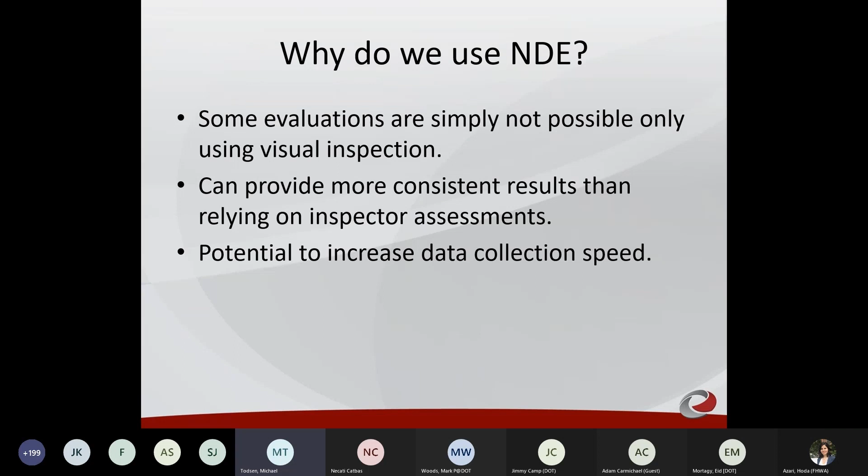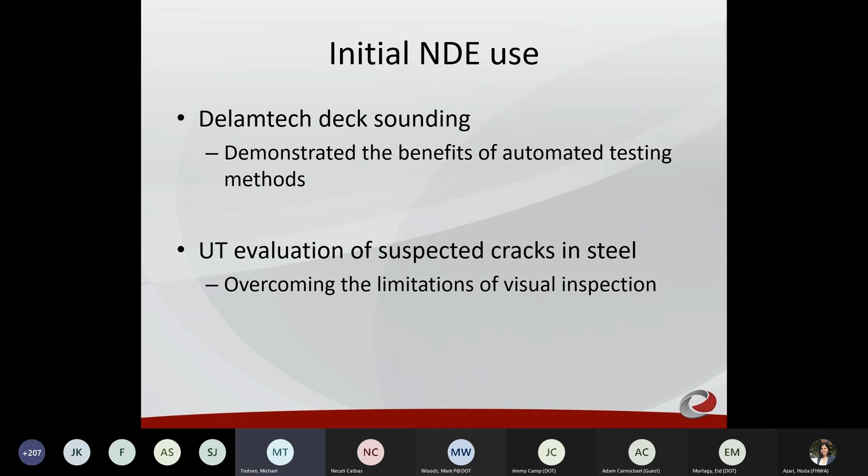When did we first get into using NDE in bridge inspection? There are kind of two initial cases - I'll get into both of these more later - but first was using equipment called Delamtech, which we used for deck soundings. Then using ultrasonic testing for evaluating potential cracks in steel structures.

Currently, we use it for deck inspection, which led into some use in substructure as well. Obviously, structural steel is very common, and we're getting more into the instrumentation and health monitoring side of things. We've done some work with underwater evaluations - I don't know if everyone considers this NDE, but it provides us with some valuable information. And we're starting to get into drone activity a little bit.

All right, let's start off with the deck evaluations. What we're looking for is really a project level assessment so we can use information in the development of plans for repair work. Looking at our typical multi-beam or girder bridges, steel girders or pre-stressed beams make up the majority of our inventory with a concrete deck.

We commonly use a concrete overlay using a low slump dense concrete that other people may have heard of as the Iowa mix. We've been using it for quite some time, and we now have a lot of bridges in our inventory that are ready for replacement of that overlay, and we'd like to place a second overlay instead of replacing the deck where possible to keep it more economical. But we need to understand the condition of the deck underneath that overlay to really understand what we have to work with.

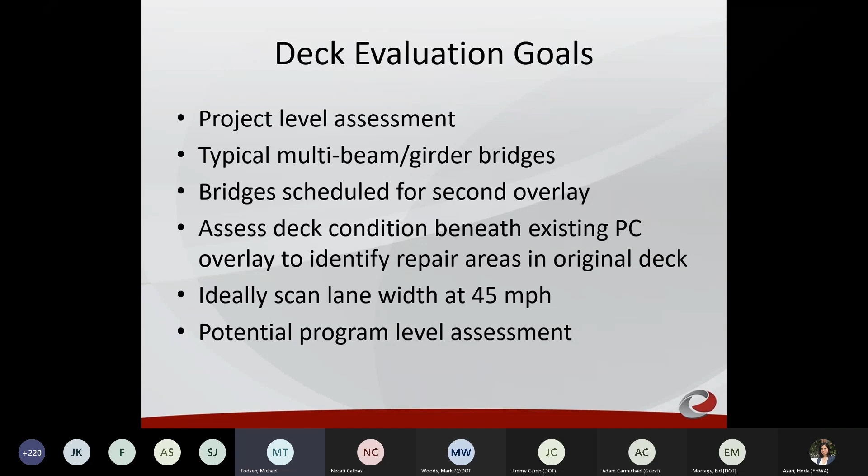Here's some detail on the types of overlays we use. We mill off a 1/4 inch of the original deck and put back 1 3/4 inches of our dense concrete. At the same time, we'll remove any deteriorated areas in the original deck as partial or full depth repairs.

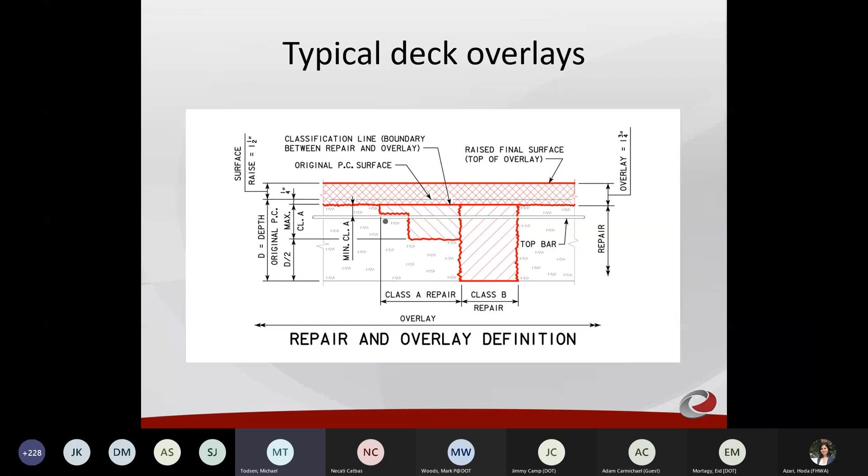Now, when we go to placing a second overlay, the determination of those deteriorated areas in the original deck gets to be the challenge. Just to give you an idea, a typical spot on the bridge deck that's been milled and the partial depth repair has been cleaned out, ready for placement of the overlay.

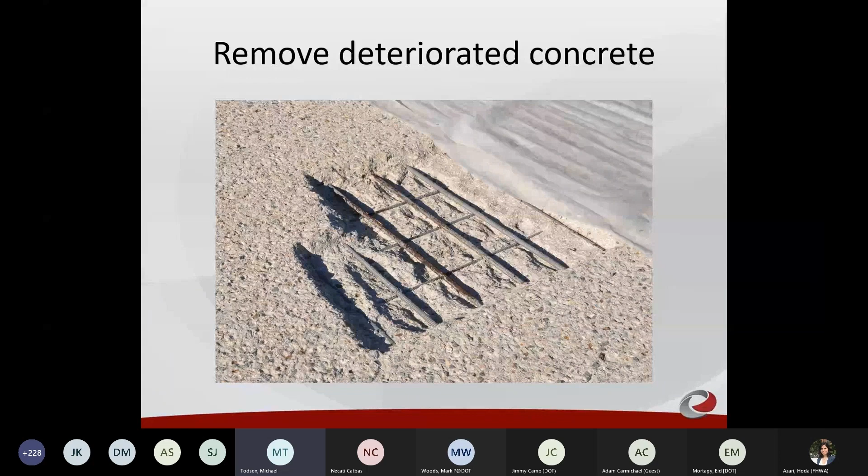We place the overlay, we put a slurry coat as a bonding agent, and then place the dense concrete mix on top of there.

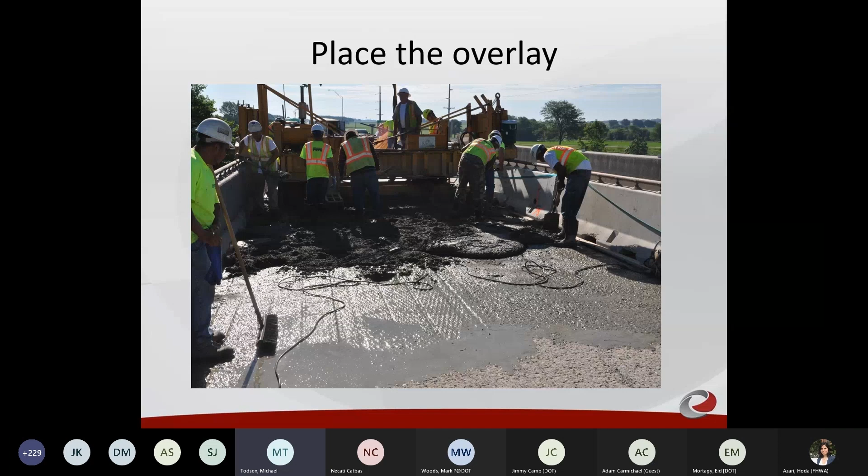One thing to provide some extra life in our overlays: after we start to get some debonding between the overlay and the original deck, or perhaps some deterioration at the reinforcing level and we get some hollow areas, we will inject epoxy to reestablish the bond and add additional life to the overlay. However, this can complicate our evaluation of the deck as it adds another layer of material that you have to take into consideration when performing evaluations.

I think we're all familiar with the traditional methods for hand sounding a deck. Obviously, the visual identification, and then by hammer sounding or chain drag. This is fairly time consuming and operator dependent, especially when relying on the hearing abilities of our inspectors, and when you get around heavy traffic, this gets considerably more complicated.

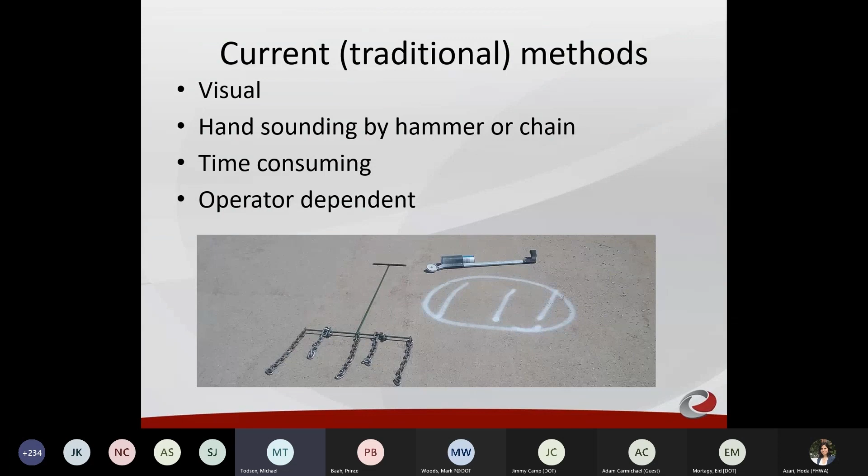Some of the limitations with the hand sounding or traditional methods: the delamination of the original overlay from the original deck cannot be differentiated from deterioration in the original deck. Hollow is hollow. It's hard to verify the depth by hand sounding. And really, we're looking to see what condition the deck is in.

As the deterioration is deeper into the concrete, it can become very difficult to identify it with hand sounding. And of course, the lane closures required not only interrupt traffic, but they also present more safety risks to the public, to traffic, and to our staff that are working in the traffic control or in the roadway.

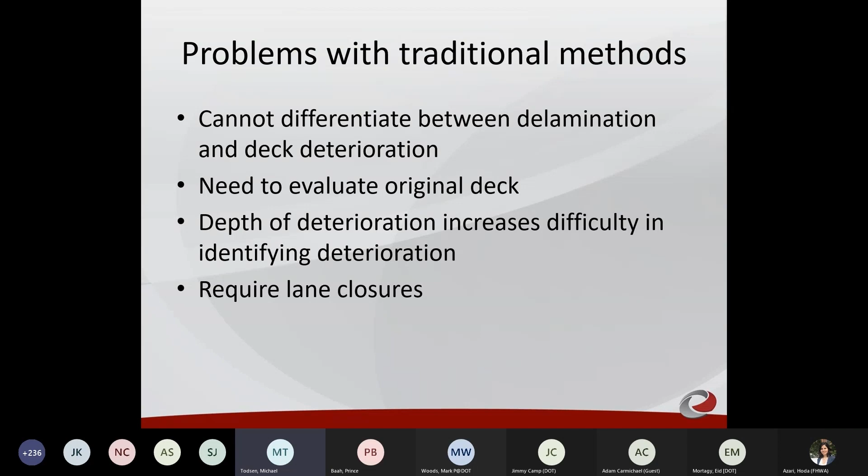This requires a lot of hand labor to clean up and prepare as a repair area, and that can affect the contractor by the requirements for allocating their resources to this project. The schedule is affected as there is a lot more time involved with all the hand labor, and there are budgetary effects to us as the contractor expense of doing this repair is on our burden.

If we had a method that we could better determine the condition of this deck in the development of this project, we probably would have considered other alternatives and may have looked more at a deck replacement than placing a second overlay. That may have been a more cost-effective solution in the end, had we known ahead of time.

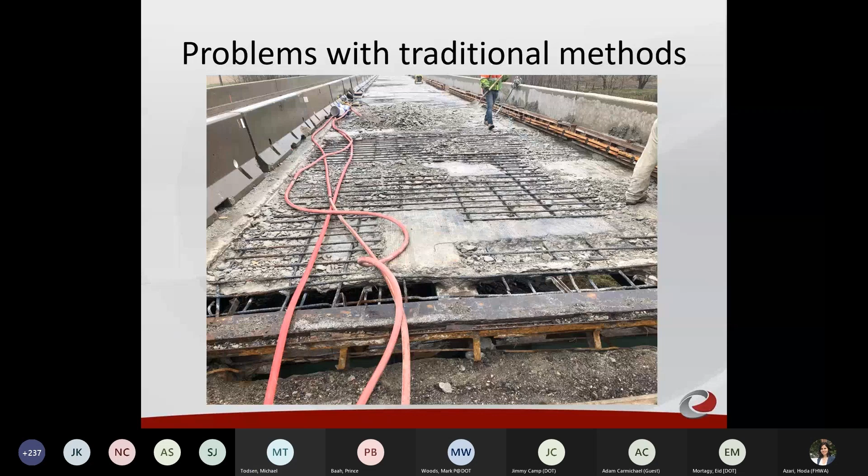The testing methods we've been using - earlier I mentioned the Delamtec. This was a system developed down in Texas in the 1970s. That's when we purchased our first machine. At one time we had 7 of them. It's an automated deck sounding machine.

It had a little hammer and a silicone-filled wheel with a microphone attached to it, and it could detect the hollow concrete similar to hand sounding. But it did remove the operator variability, and through several rounds of improvements to the equipment, we had an automated data collection system.

Unfortunately, the manufacturer of this equipment went out of business a number of years back. At the time, we purchased their entire inventory of spare parts. We have consumed that inventory and no longer have a functional piece of equipment.

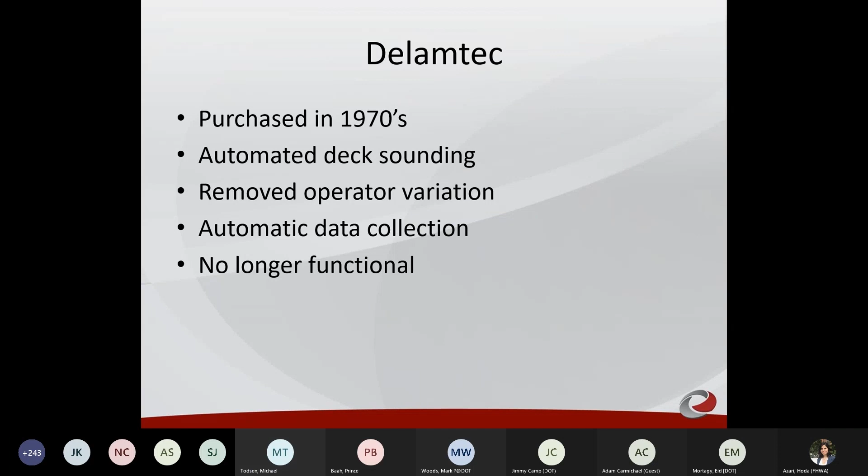So we've been trying to find another method to evaluate bridge decks and provide us the additional information we're looking for. We got some assistance with this. We started off with Rutgers University, followed up by some additional work with Jenny. We got involved in the pooled fund with University of Missouri, and then the SHRP2 program most recently.

We're looking for a practical solution, one that we can deploy readily, and that we can get good correlation with the field conditions. So looking at that project level assessment, we want to know where the areas of deteriorated concrete are on the deck, not just a general assessment that this deck may have some deterioration.

With Rutgers, we tried a number of different technologies. Starting off, we used acoustic or seismic systems using impact echo and ultrasonic surface waves. The impact echo did provide some interesting results and led to some follow-up work, as I'll describe later.

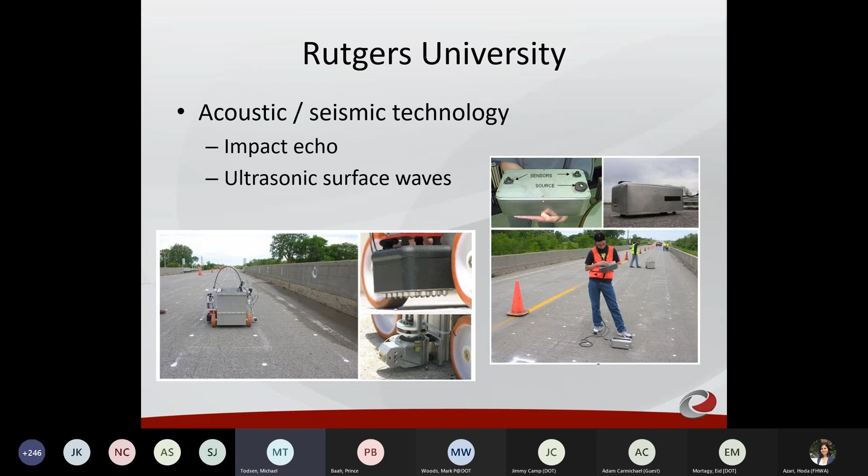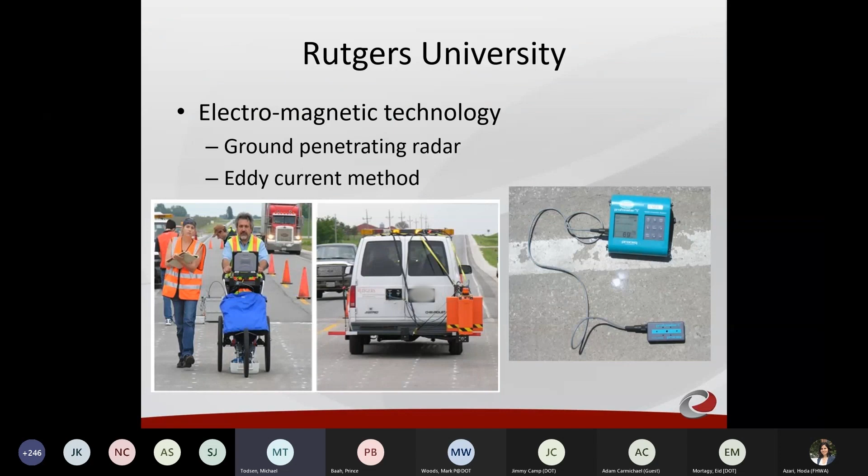Then going on to ground penetrating radar, both ground coupled and air coupled, along with eddy current testing, and half cell potential and electric resistivity.

One thing I should note here is that in Iowa, we use a large volume of de-icing salts in the winter, which leads to heavy chloride concentrations in our bridge decks. And for these, like the electrical resistivity, our chloride concentration really affects the results you can get.

And then one issue we ran into with the half cell potential: now that we've been using epoxy coated reinforcing in our bridge decks for a number of years, the application of half cell potential has become significantly more difficult, as you need to have contact with the reinforcing steel, and getting continuity among the reinforcing mat when it's epoxy coated is extremely difficult, if not impossible.

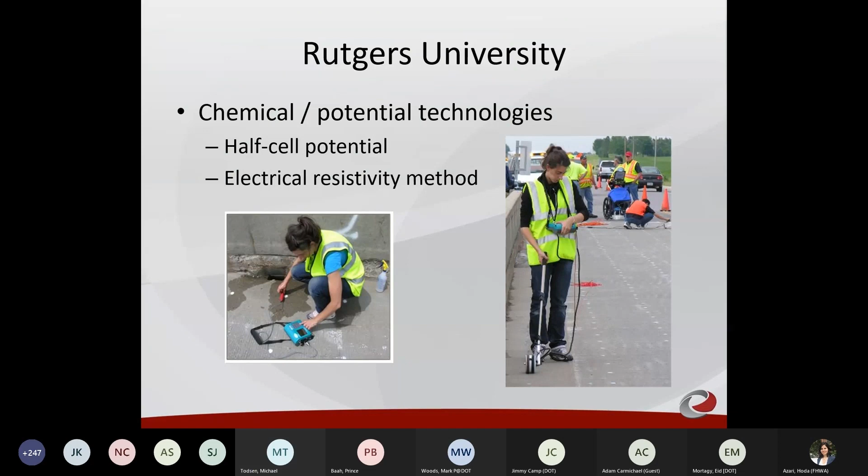Following that, we worked with Jenny on a few ideas. We got into infrared thermography for the first time for deck evaluations, some more work on ground penetrating radar. The GPR sounds very good for the data collection rate and the availability for application to use it on a more widespread inventory, or more of our inventory, to go to more of a programmatic evaluation. So we keep on trying to make that one work. Again, some more work with impact echo, and then half cell potential again.

So I mentioned we worked with Dr. Washer down at University of Missouri on their pooled fund with infrared thermography. And that was using these handheld cameras.

The basic principle here is that when you have delaminated concrete, it will heat and cool during the thermal cycles of the day at a different rate than the surrounding solid concrete. And the sensors in these cameras nowadays are sensitive enough that they can pick up on that very small difference in temperature. And these cameras are really impressive in what they can do.

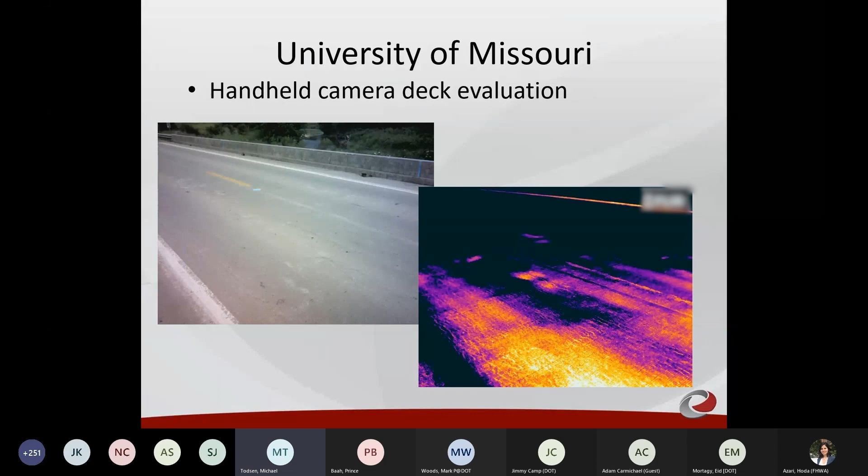With that said, we went down underneath the bridges, and it worked quite well on the bottom of decks. Of course, there we only have about an inch of cover on our reinforcing. It worked extremely well there. But then we noticed that it worked quite well on the substructure as well.

This happens to be a particular pier that was adjacent to our roadway, and our local maintenance staff was concerned that some of the concrete might be loose enough that it could fall into the roadway. And we're going to go out and hand sound this pier.

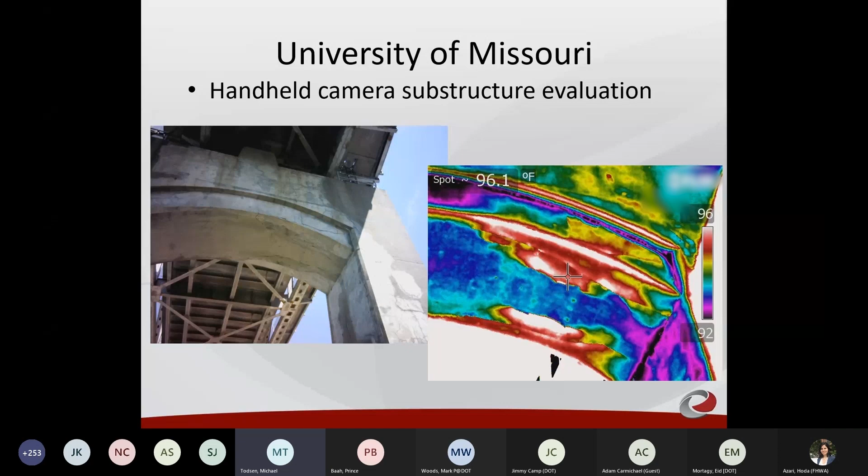And I took out the camera with me and was able to collect some images from the ground, and got very clear results on the locations of the delaminated concrete, and showed these to our field staff, and they were very satisfied with the results. They felt it was better than they could have achieved by hand sounding.

Doing the hand sounding would have taken a considerable amount of time, would have required a lane closure and bringing out a lift. This took, with the IR camera, took a few minutes with no lane closures, so there was no traffic control, and it was very cost effective that way.

One thing I should note, I've gotten a few questions about: these images are using the rainbow colors and high color versions. I've found that for people unfamiliar with infrared images, the high color versions are much easier for them to understand. Myself, when I'm using it, I now prefer the grayscale images, and I think most people, after they've used it a while, prefer grayscale over high color. But for people who hadn't seen many IR images before, the high color version is just much easier to understand.

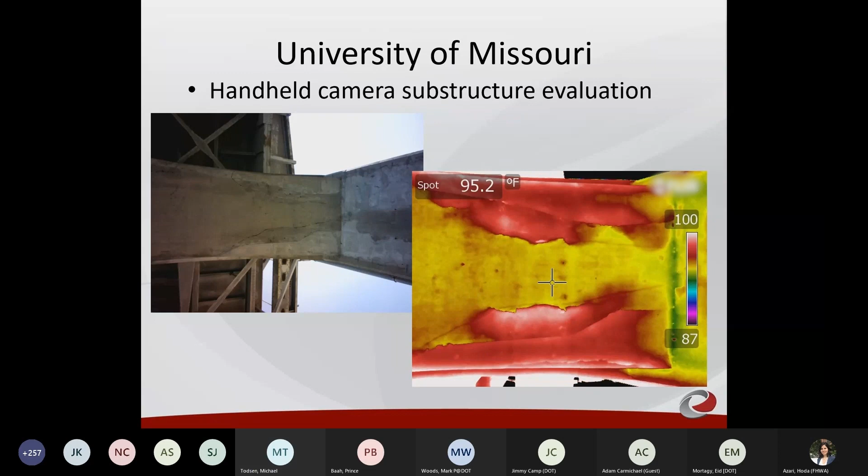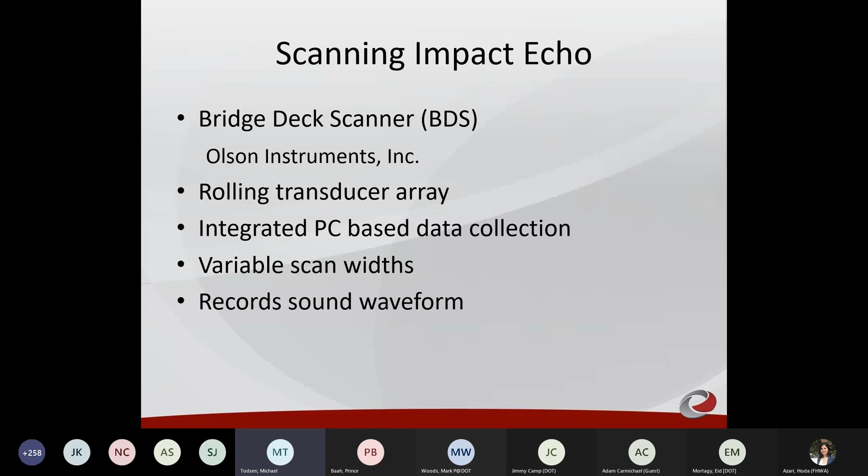We did some initial tests on bridges without overlays, and we had very good correlation with other test methods as well as the repair areas found during construction work. So the system works quite well. The data collection is straightforward - we can train our maintenance people fairly easily to do it. However, the post-processing does take some more understanding, and I think for our sake we'll be keeping that as a small group in our office that will do the post-processing.

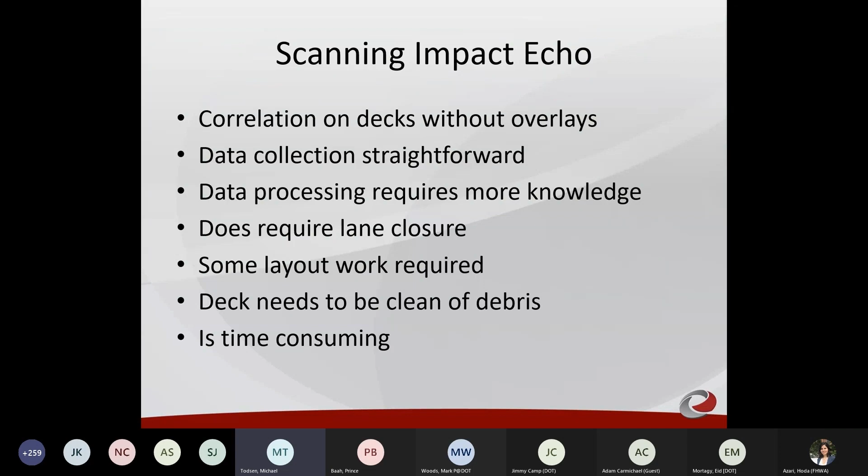It does require lane closures and some layout work. The deck needs to be clean of debris, so there's a little work there. As far as time is concerned, it takes about the same amount of time to scan a deck using the Impact Echo system as it would hand sounding. However, after talking to some of our staff that have done both, they all would prefer using the Impact Echo system over hand sounding. Here's what the system looks like.

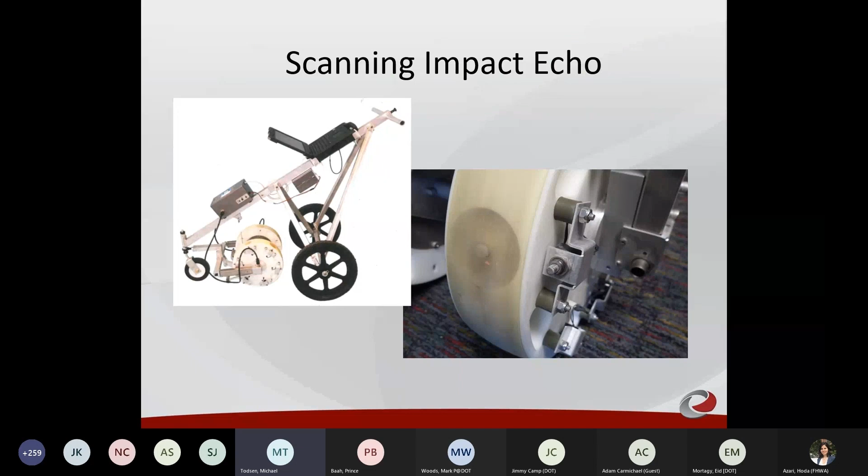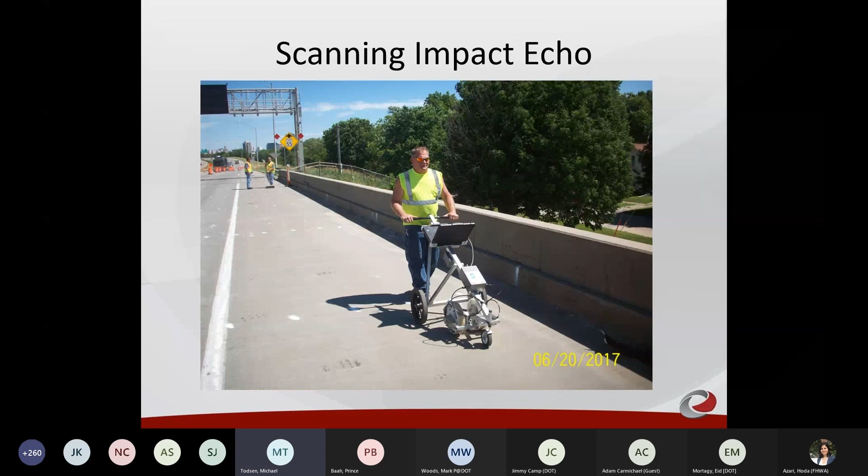Going through this bridge highlighted some of the challenges. The difference between the depth of these repair areas and the bond between the original overlay and the deck were very small depth differences. In addition, the depth of the overlay and the depth of the reinforcing both varied along the length of the bridge, so it's a challenge to narrow down your results to just the deterioration in the original deck and not include debonding of the overlay. But we're working on it.

Then the other thing we tried, 3D radar makes a stepped frequency ultra wideband GPR array. GPR just has so many advantages as far as data collection rates that it's hard not to try and make it work. Depending on the system you purchase, it can scan 6 to 8 feet wide at a pass at 5 miles an hour. It has a multi-channel antenna with variable frequency range. It's vehicle mounted, similar to most air coupled GPR, so it makes for traffic friendly rapid data collection.

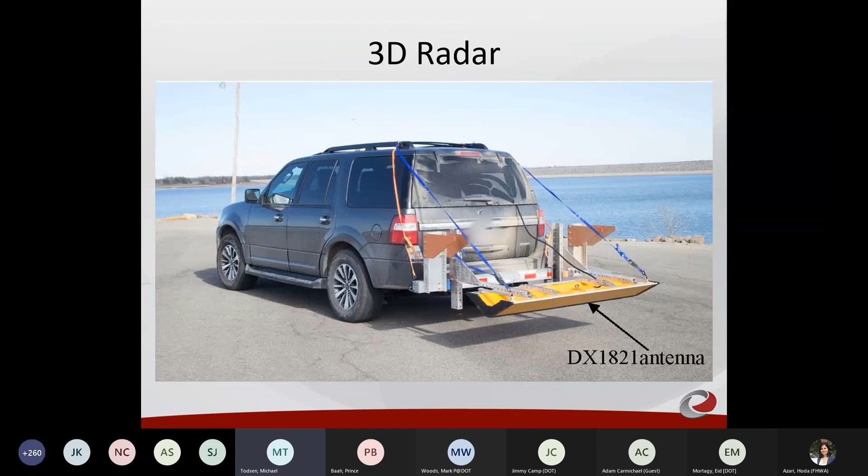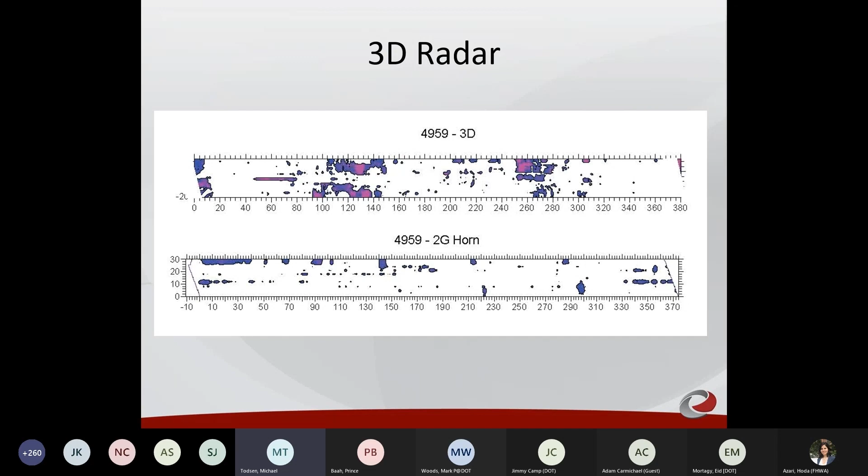With the GPR, what we're finding out is with the volume of salt that we've used and the level of chloride contamination we have in our decks, we get a fair amount of signal degradation as a result of the chlorides. That signal degradation from the chlorides is easily confused with the degradation you may get from concrete deterioration or rebar corrosion. So it's really difficult to differentiate what is simply chloride contamination and what is actual deterioration.

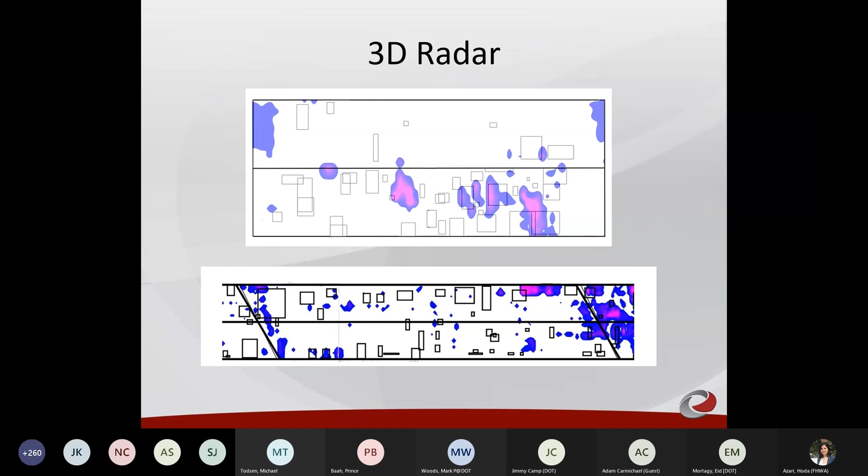More recently, we have been working with a company called Advanced Bridge Inspections. They have an automated sounding system which provides a high correlation to hand sounding. It provides for fairly rapid data collection, and it's allowed us to go and do some program level data collection as well as project level work.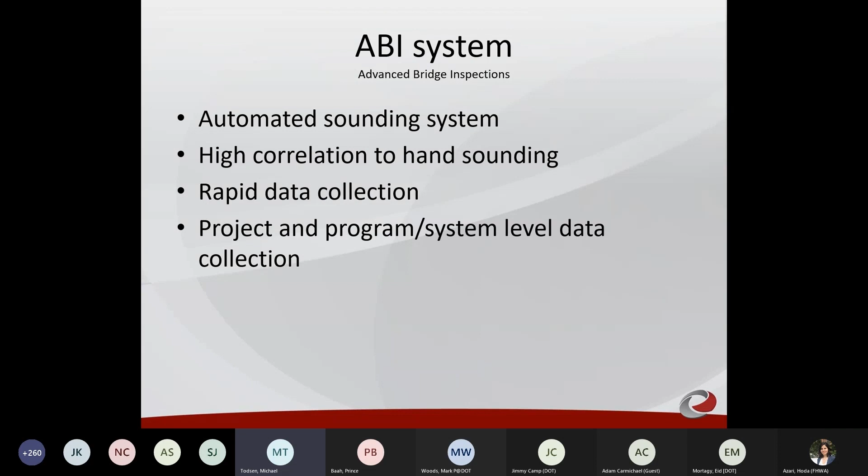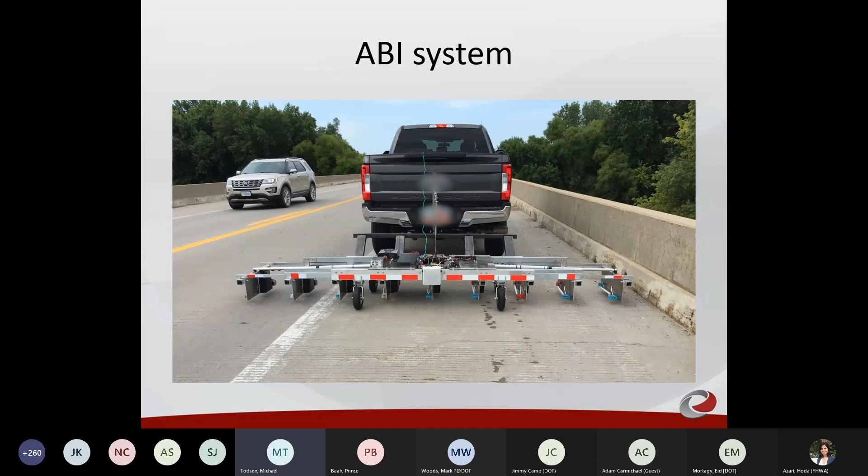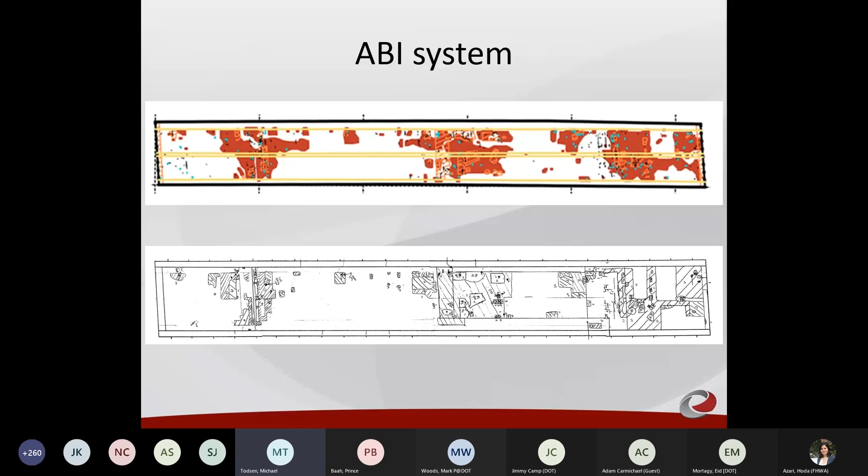So we've started using this quite a bit. Of course, it cannot answer our questions about the condition of bridge decks under an overlay, but for bridges without an overlay, it's been working quite well for us.

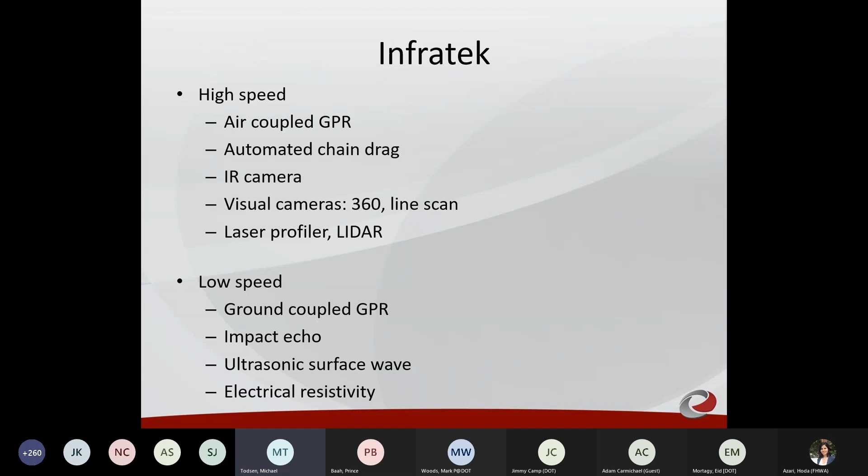Most recently, we've also worked with Infratek, evaluating some of their new equipment. They have two systems: a high-speed system using air-coupled GPR, automated chain drag, IR, visual cameras, laser profiling, and a low-speed system with GPR, impact echo, ultrasonic surface wave, and electric resistivity.

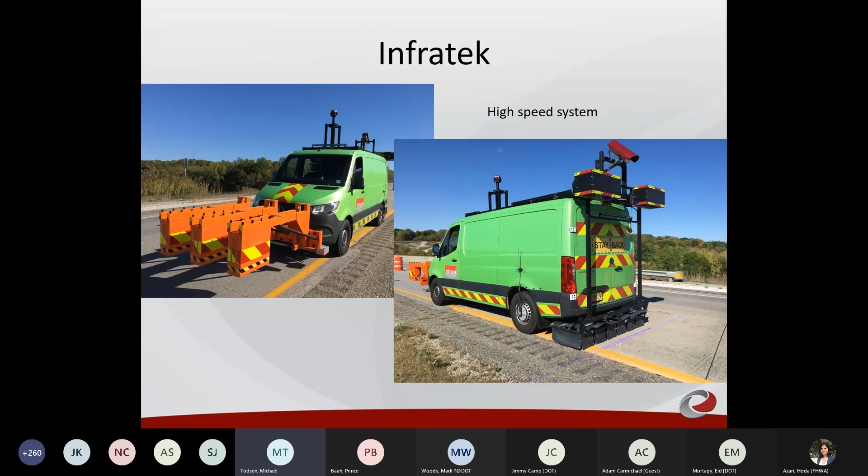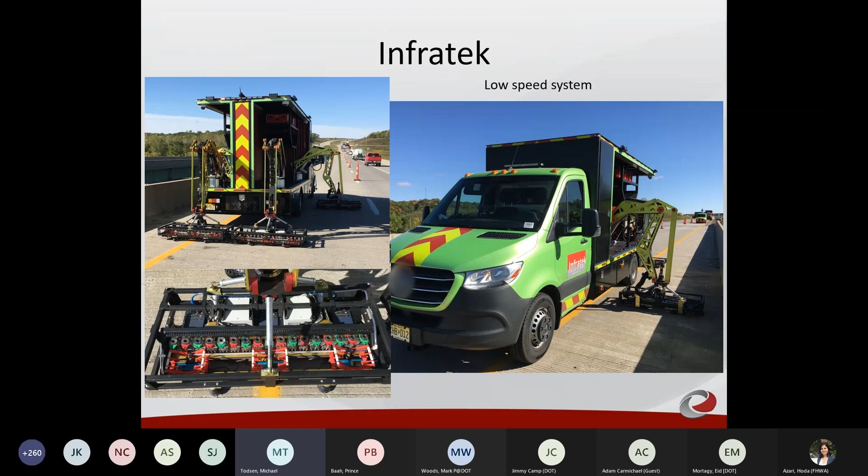Then they have their low-speed system. This is a bit of a transformer, kind of interesting to see it on the roadway. It has the ground-coupled GPR, impact echo, electrical resistivity, all mounted in pods attached to arms which unfold from it. This moves a couple feet at a time, then the arms set the sensors down and collect data, lift them up. The truck moves ahead a couple feet and slowly works its way across the bridge.

One thing we found, there's always something you're not expecting. One of the things with this system was they integrated a line scan camera, as opposed to the traditional cameras I've seen on a lot of other systems. And these line scan cameras have provided some of the best images from a technical aspect that I've seen for evaluating bridge decks.

They get the same images day and night, regardless of the sun or shade or clouds, and it's a very high resolution image that makes it work well with crack analysis algorithms. So there's always something you can find when looking at new equipment.

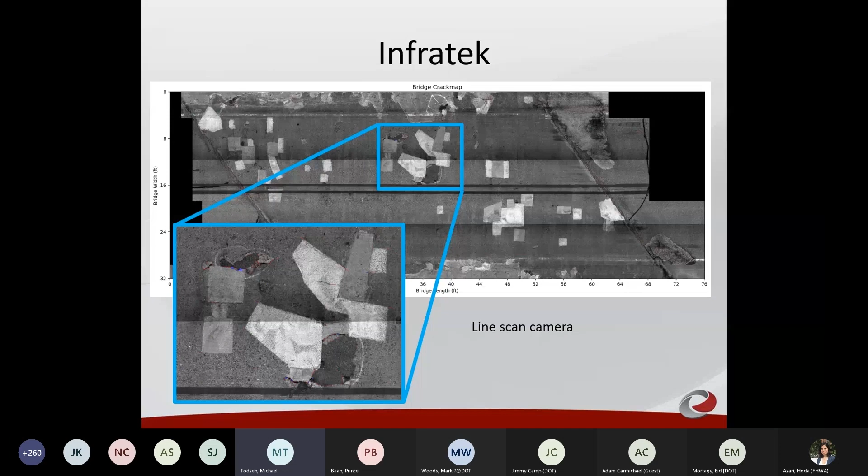Interesting thing about this is we have not had a good correlation between the condition of the concrete on the surface and the condition of the reinforcing. You would think if we get 100% section loss in the reinforcing that it would cause some deterioration on the concrete, but we have areas with complete section loss where the concrete looks fairly sound, and areas where the concrete looks significantly deteriorated but the reinforcing is still largely intact.

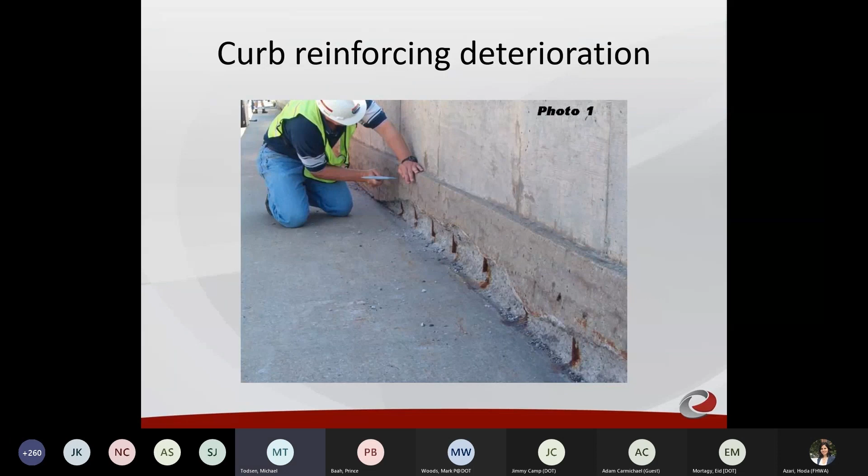So a few years ago, we worked with the Center for Non-Destructive Evaluation at Iowa State to come up with ideas on how to look at this. Again, we looked at GPR - due to the geometry of the location, we had trouble making that work consistently. They put together a magnetic flux leakage system that seemed to work. However, it was a one-off kind of laboratory-assembled system, and it's a long ways from being ready for widespread deployment in the field.

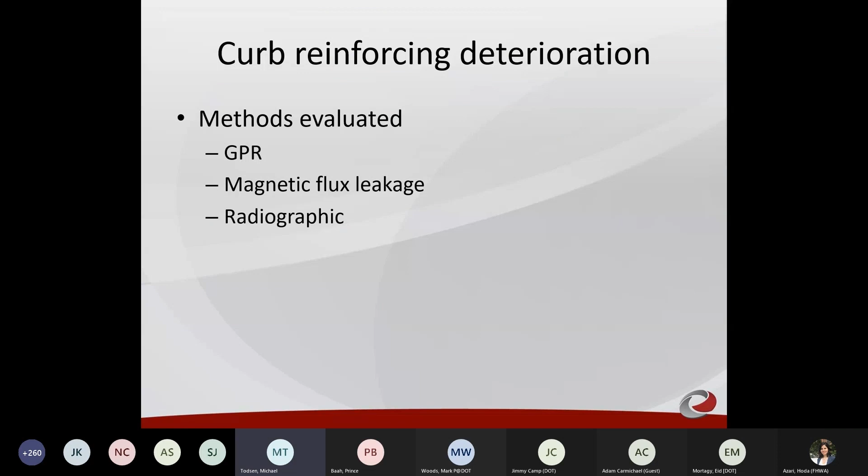We also looked at radiographic testing, which works excellent in the lab. However, deploying it in the field was problematic, as you need a significantly larger radioactive source than you would, say, with evaluating a weld in a steel plate, due to the thickness of the concrete. Between the regulatory issues and safety concerns, the field application really wasn't practical. So if anyone has come up with a good way to evaluate the reinforcing at the bottom of the barrier rail, we would be interested in hearing what you have.

So I guess what's next - we're continuing to work with vendors and practitioners to improve the results we're getting and try new methods. I'm not sure that the dog here is going to help us, but we're at times really willing to try just about anything.

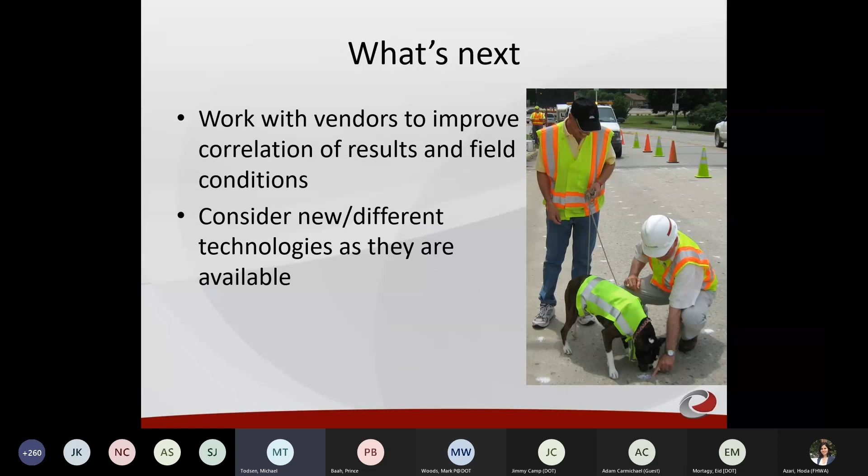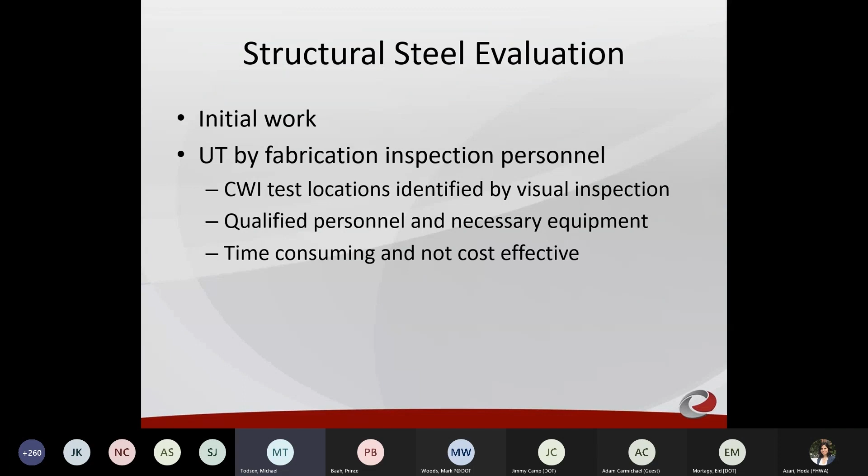Moving on to other parts of inspection work, structural steel evaluations. Initially, we had UT inspection by our materials fabrication inspection staff. They had CWIs and the equipment, but scheduling time for them to return to a bridge, often with traffic control and a snooper, was just not a cost-effective way to do things.

Our current practice, mag particle is still our primary method. We use both traditional and phased array UT. I like the phased array UT a lot. Looking at pins and this pin and hanger connection in the picture, the equipment is more expensive. It requires more training and is more complicated to set up.

But at least in my opinion, the analysis and evaluation of the results as you're scanning are much clearer with phased array testing than with traditional UT, and for that I think it's worth the additional cost.

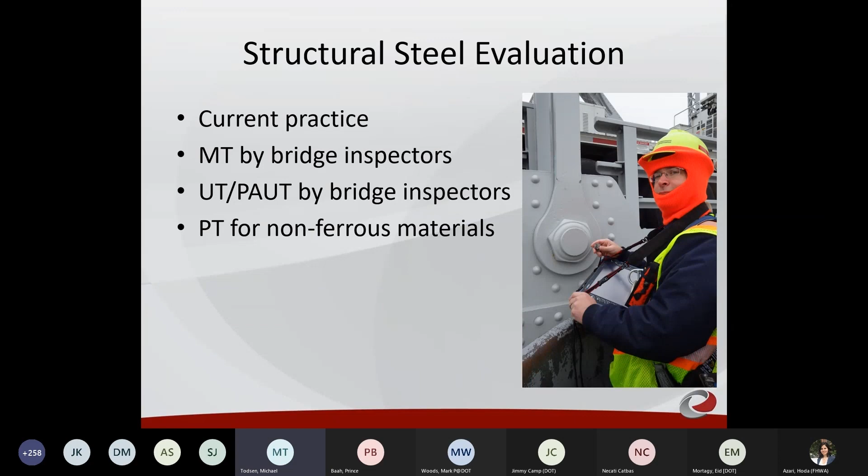We've then moved into some of our instrumentation and load rating, or health monitoring, I should say. Initial work was in load rating and fatigue life evaluation. We've done some wind and vibration monitoring, and we're moving more into health monitoring.

The original load rating work was to look at bridges with marginal capacity and see if we could refine the distribution factors to improve the load ratings as much as possible. We've moved on to evaluating unique loadings, such as when bridges are used as haul roads by contractors, or with farm equipment around the state, which produces unique loads on bridges too. So we're working to understand the distribution factors applicable to those loads.

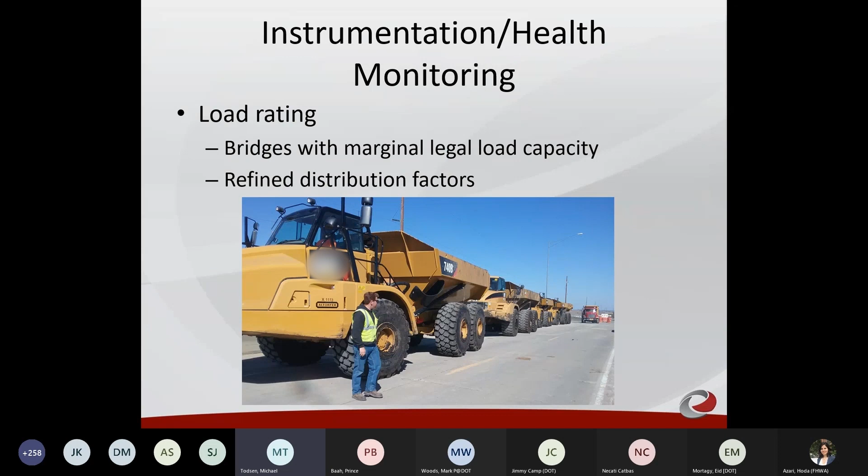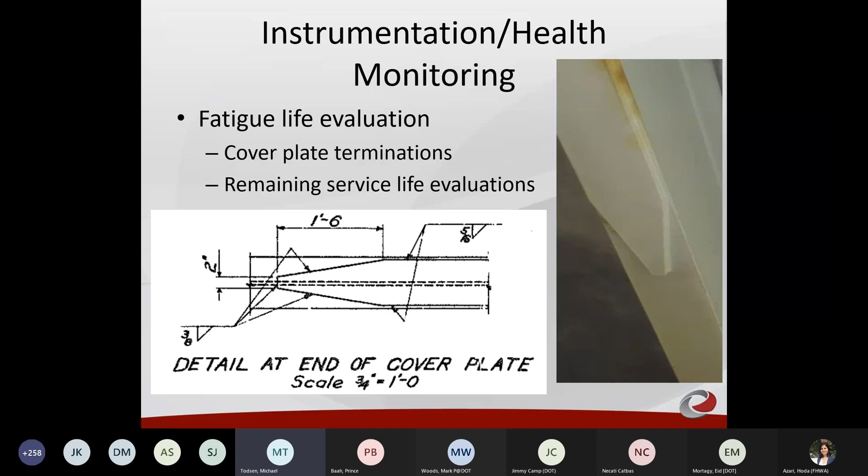We've had one unique feature that we used a lot in the 50s, these tapered cover plate terminations. We have a policy that if we're replacing a deck on a bridge with cover plates, we have to retrofit the ends of the cover plates to avoid fatigue issues. This tapered detail can be very problematic to cost effectively retrofit. So we've done fatigue life evaluations on these bridges where we've shown that the stresses are underneath the CAFLs, constant amplitude fatigue limit stresses, and through testing we were able to show that the retrofitting was not necessary.

Wind and vibration monitoring - this was an interesting one. This is a bridge we have over a reservoir, and under the right wind conditions we can get some movement in the bridge deck. Through analysis and monitoring we've found that we can get up to 2 inches of movement. However, that is enough that it causes considerable concern for anyone on the bridge.

We've had people abandon their vehicles and run off the bridge because they thought it was going to collapse, and they felt the movement was about 2 feet based on their perception while they were on the bridge. So we now have a system where we can monitor the wind speed and vibrations on the bridge, with trigger events set up to notify our maintenance staff, who will close the bridge when necessary to avoid concerns with the public being on the bridge while it's moving.

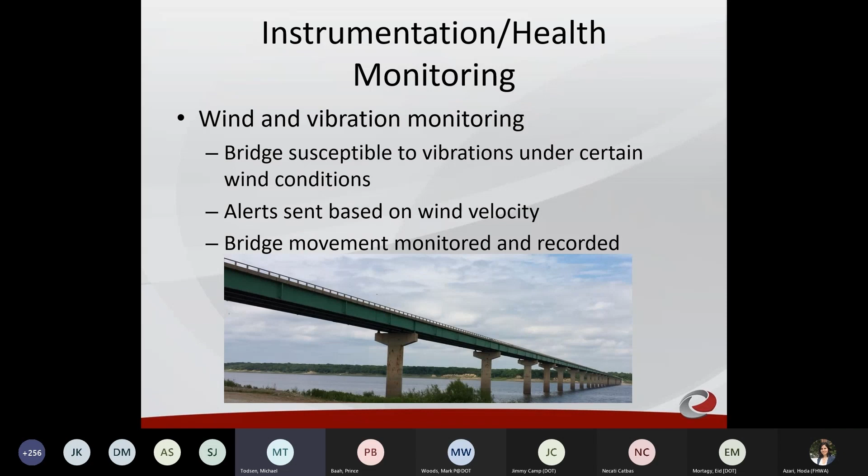We did some initial health monitoring, small scale installations, really just checking the viability of getting remote monitoring working and sustainable. We've done a couple of full-scale installations. Our initial one was in 2011 on an arch bridge, where we had a number of sensors located throughout the bridge. Then we moved on to a pair of arch bridges being built over the Mississippi River. As part of the construction, we're installing a health monitoring system there where we'll have over 500 sensors located throughout the arch spans and in the approach spans.

And we're working on the question now of how much data to collect and how to compress it and how to store it, because at their full capacity, these sensors can produce just a ridiculous volume of data. So saving all the possible data is just not practical.

However, we want to have data that's both giving us information now as to how the bridge is acting and changing over time, as well as having adequate records so that 20 years from now we can go back and look at what we've done and have valuable reference data. So figuring out a frequency to collect data, how often to collect it, and how to store it, is an interesting question for us.

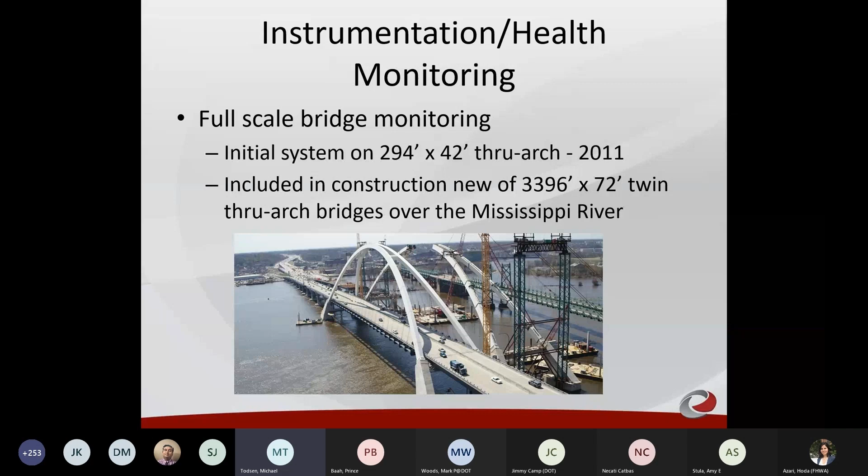Some other work, the underwater work. We have over 2700 bridges and waterways in Iowa. We have no divers, and it's not uncommon to have flood events. And when we do, our water visibility is near zero, so diving has limited effectiveness. We're looking for ways to evaluate flood damage.

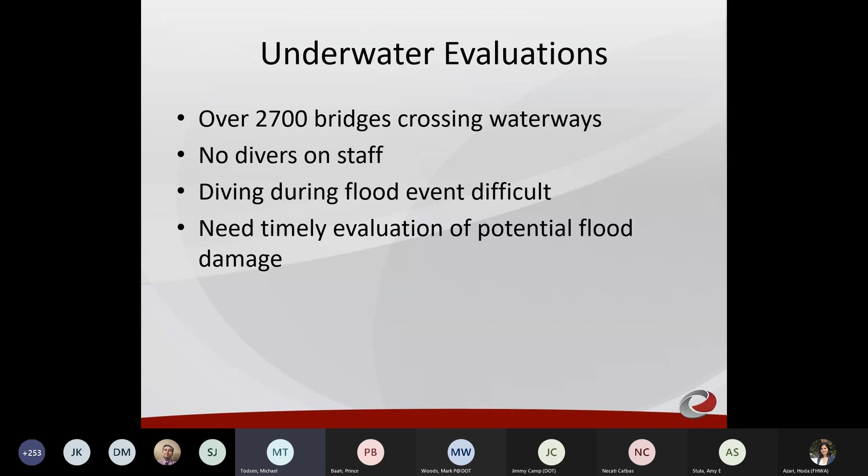There's a few systems on the market. Kongsberg is the one we went with. Teledyne has one, and Coda Octopus as well. Really, the main thing leading us to the Kongsberg system was cost. It's considerably cheaper than the others. But it allowed us images on the right.

You can see pile bents, and you can get a pretty good idea of the condition there. Image on the left, we're able to see this small creek, a small single span bridge over a little creek that had a large flash flood event. It undermined the south abutment to the point that we lost the fill material behind it, which we knew, but the question was on the north abutment if we still had fill material. With the sonar system, we were able to see that we had undermining of the abutment, but we had not lost the fill behind the abutment.

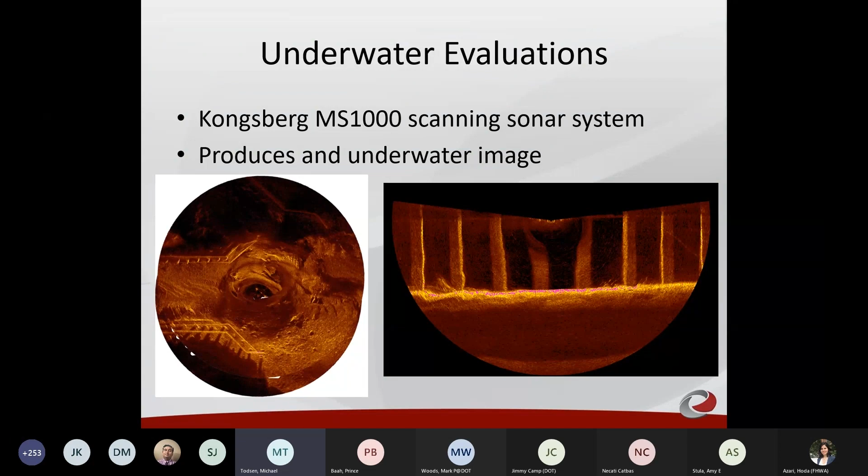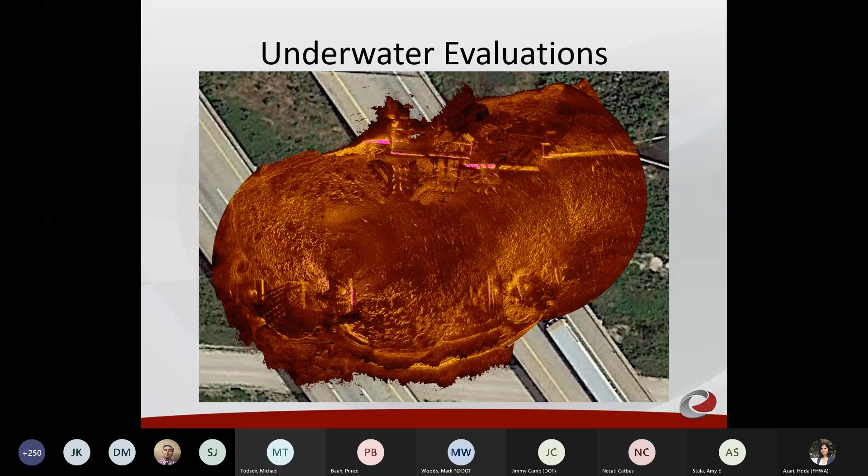Here's another case where it was helpful for us. This was a pair of bridges over an abandoned railroad right-of-way, and during a flood event our roadway became a levee, and this old right-of-way became a river. We had heavy scouring underneath the bridges, and you can see on the upper right there's three sets of pilings where you can't really see the pile caps on top of them that were heavily scoured out. The south pier on the right bridge has exposed footings, but the piles have not been exposed. On the left bridge, the south pier has some pile exposure, but nothing to the extent of the other bridge. So it was able to give us a clear indication of what was going on there, which otherwise would have been very difficult to achieve.

UAS is kind of something we're just getting started on. We're not nearly as far as some other states like Minnesota, but we're definitely interested.

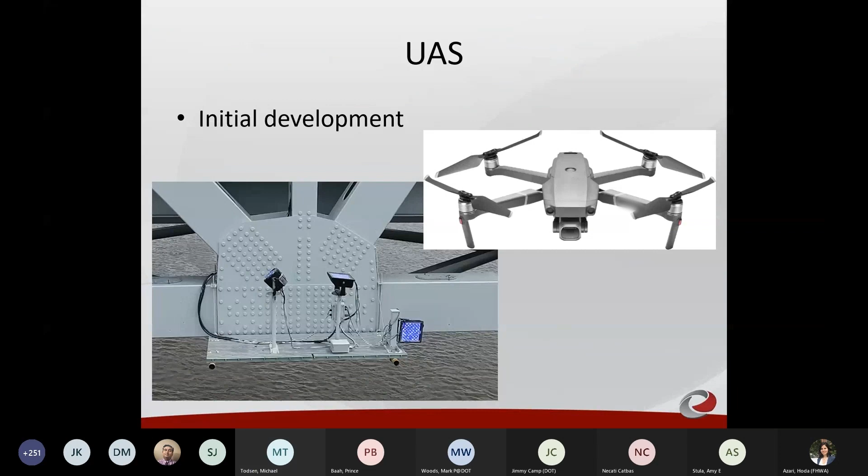Recommendations I would have for other states: when you're trying something new, make sure you find a champion to work on it, someone who will take interest in it and put some effort into it. It can be challenging, and you need to find someone willing to meet those challenges. Then figure out what you really are looking for in your information. Not just are you looking for concrete deterioration, but are you looking for steel corrosion? What exactly do you need to know to make sure you ask the right questions?

Then learn your environment, like ours, where salt affects the GPR, and what materials you use in construction that can affect the appropriate tests and test results. And verify results. Just because something has worked in another location does not mean it will work for you. That's what we found to be the case.

Some lessons we've learned: you need to have a basic understanding of technology to make it work, even if you are hiring outside consultants. Know how your practices will affect the results, and work with the vendors. Make sure they have the experience and qualifications that you need, and make sure they understand what your expectations are and what you're looking for in the results.

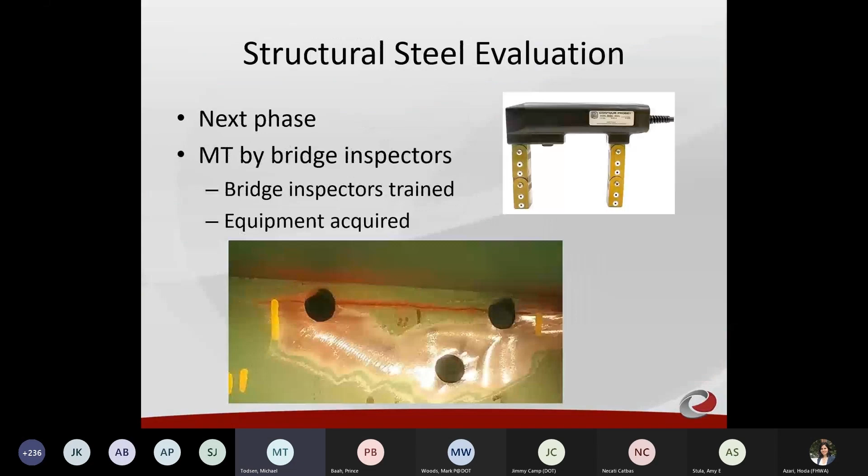Have you tried any methods for finding delamination of concrete covered with asphalt overlays? No, we have not. We do not use asphalt overlays except in very rare circumstances, and that's normally a bridge that's scheduled to be replaced in short order. So we haven't looked at evaluating bridge decks under asphalt overlays.